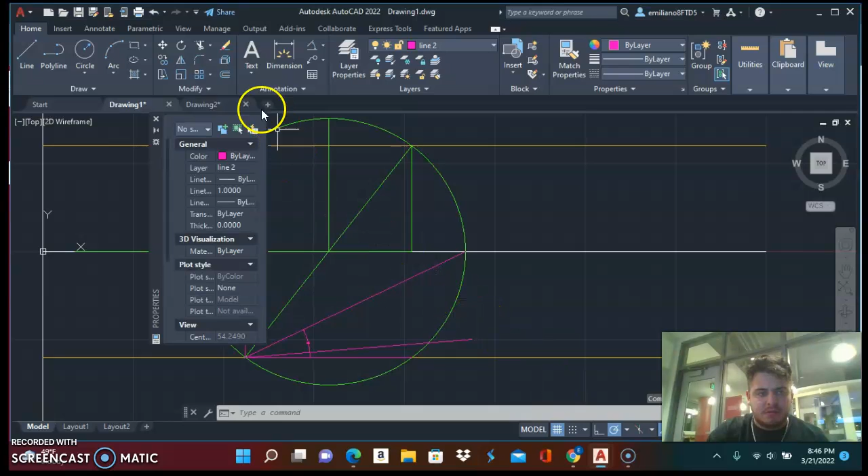I took a picture. It's not that one, this one. So this is the work that I did, but let me go ahead and start over. So the question was asking for the minimum and maximum stresses and the max shear and the angle between the horizontal plane and the maximum stress.

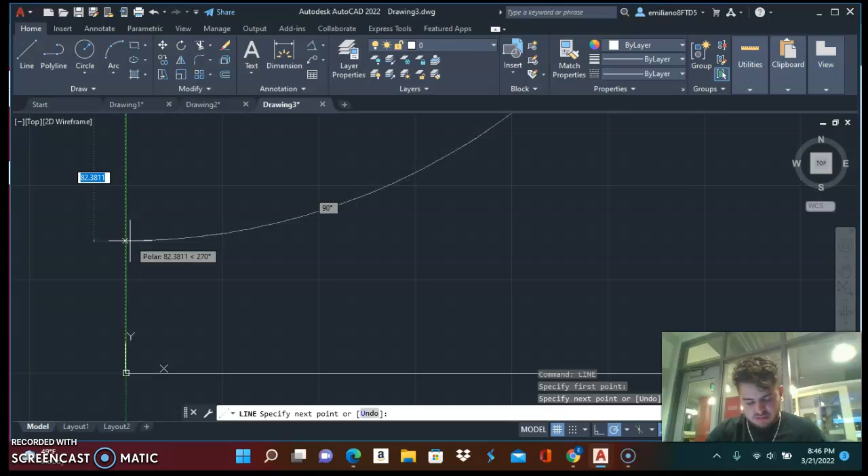So let's do a line from here to 100. Let me check real quick. So for sigma ZZ, it was 125 positive since it was in compression. Also, sigma XX is in compression, so it's going to be 75.

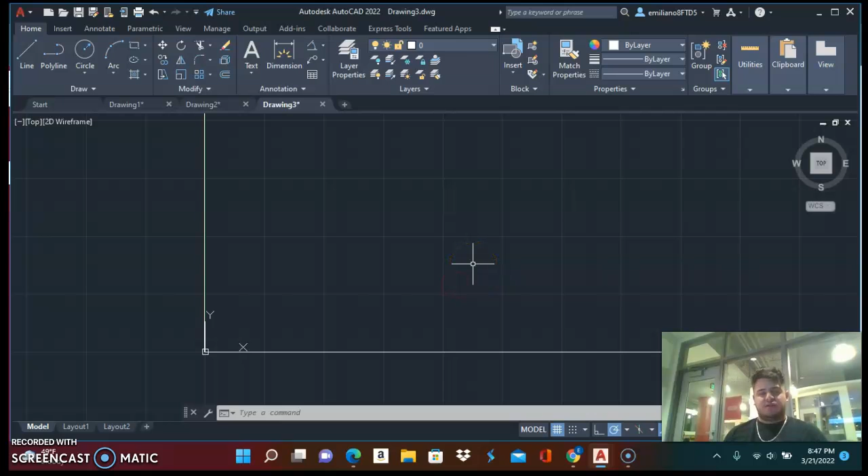And then for the shear, tau ZX was positive 40 since it was going counterclockwise, so it was positive. And then for the shear XZ, it was negative 40 since it was going clockwise, I believe. Yeah, it was going clockwise.

So now we got that. We're first going to plot our lines. Sigma XX was 75. Let's make another layer, calculations. You can do it green. Oh, I forgot something. I also need to do a line from here to 100. Okay, now that's done.

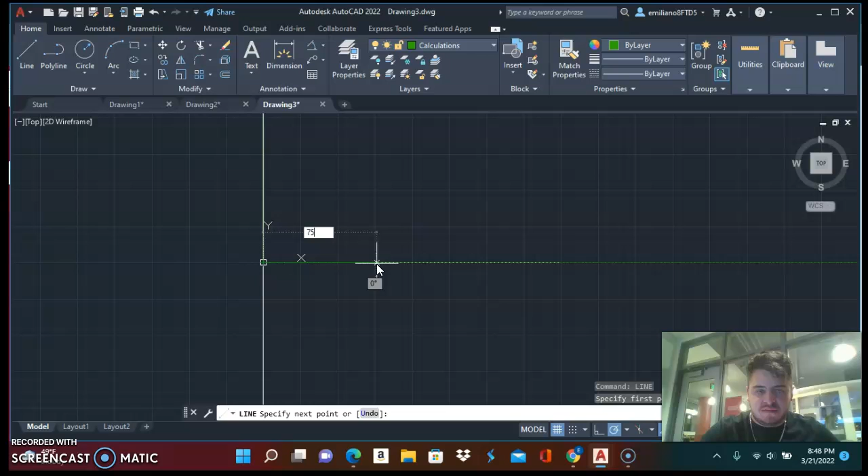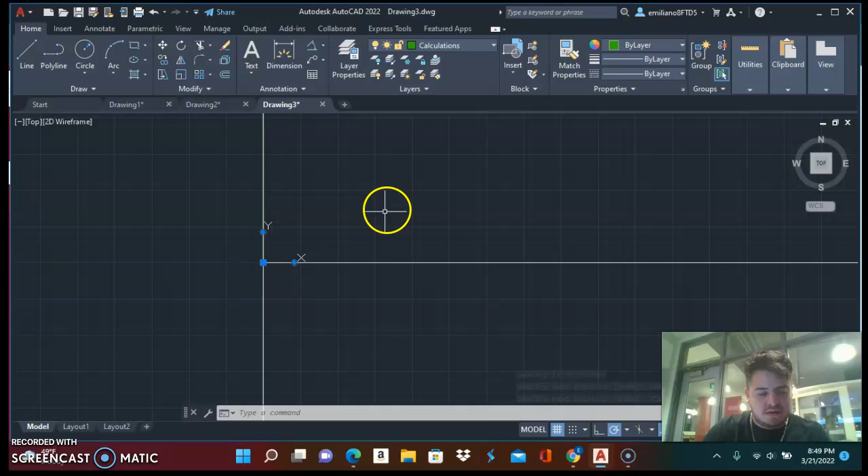So we're going to start from a line. Start from 0 and go all the way to sigma XX, which is 75. That's 75 right there. Make another line, which is 100. Let's make the line again, 0 to 75, which is sigma XX. There we go.

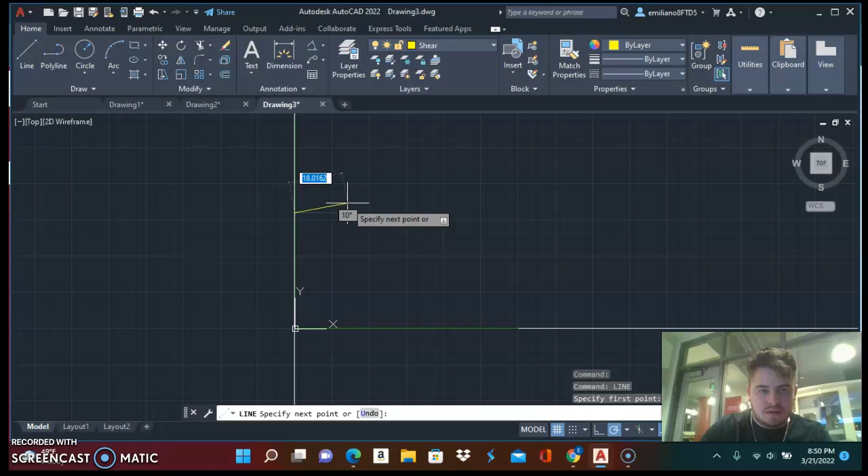From there, I don't know if this is the correct way of doing it, but this works for me. I'm going to do another layer, shear, in yellow. So for shear, it was both 40 and negative 40. So let's make a line at those points. Start from 0, 40, and go all the way down.

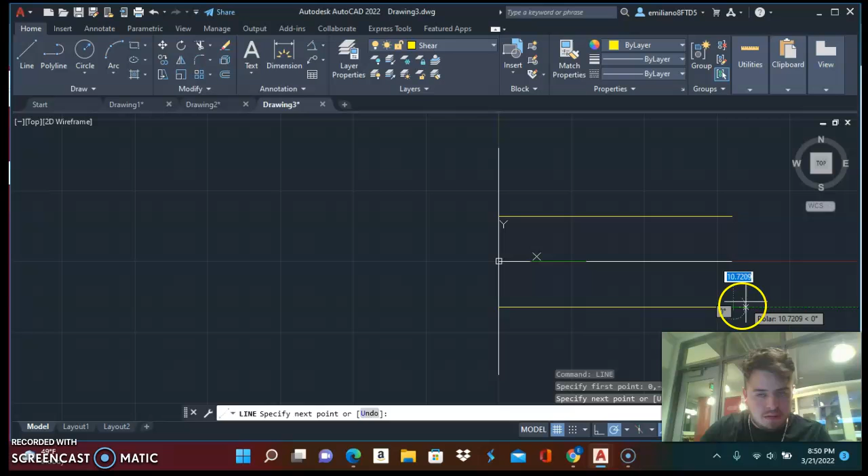And then we can make another line from the shear point at 0, negative 40. There you go. I'm not sure that's straight, so let's make it again. Okay, so 0, negative 40. Okay, I think that's better.

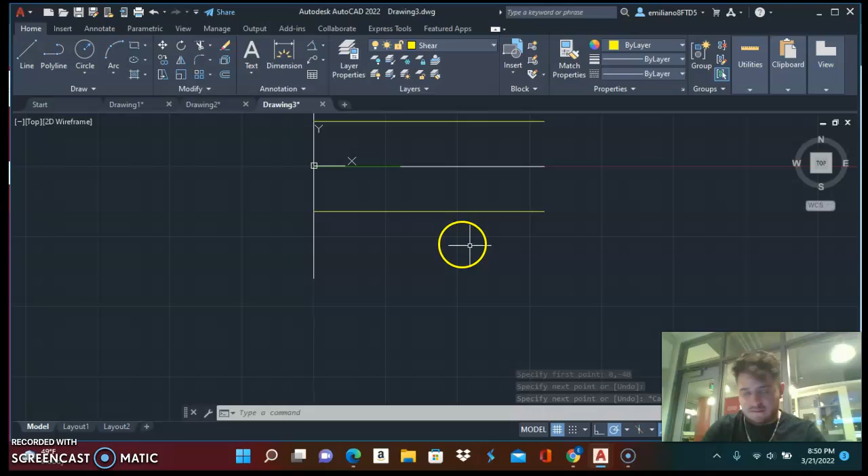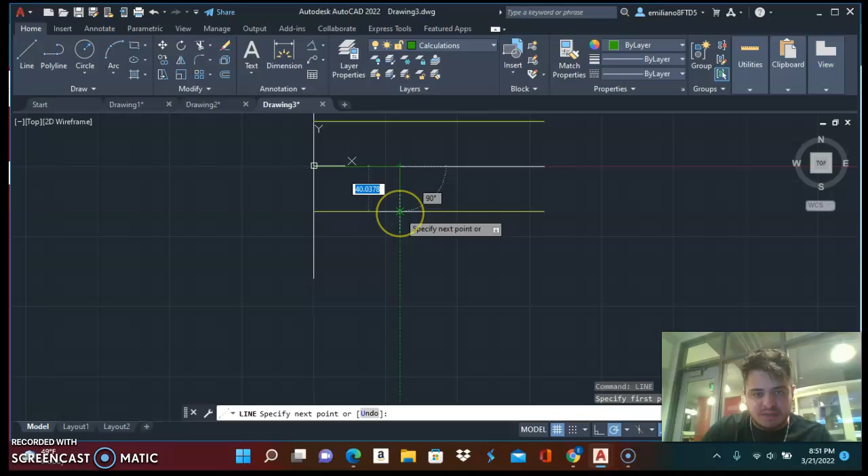So now I noticed that sigma XX is 75, and it had a negative shear, so we can go down to that line. Back to the calculations layer: a line from sigma XX to this point, the shear. We're going to delete that and put another line from this point, 0, to sigma ZZ, which is 125.

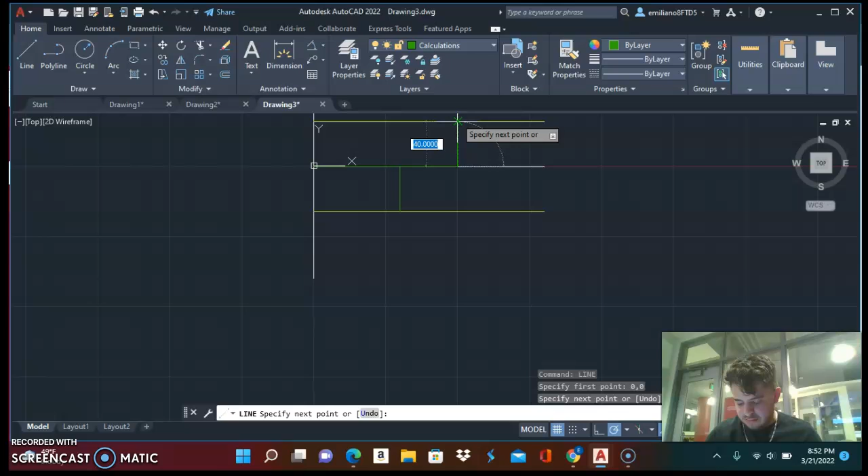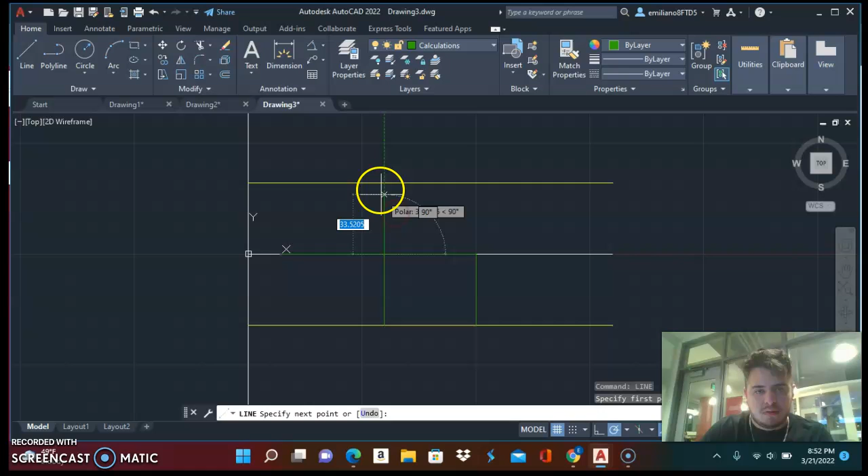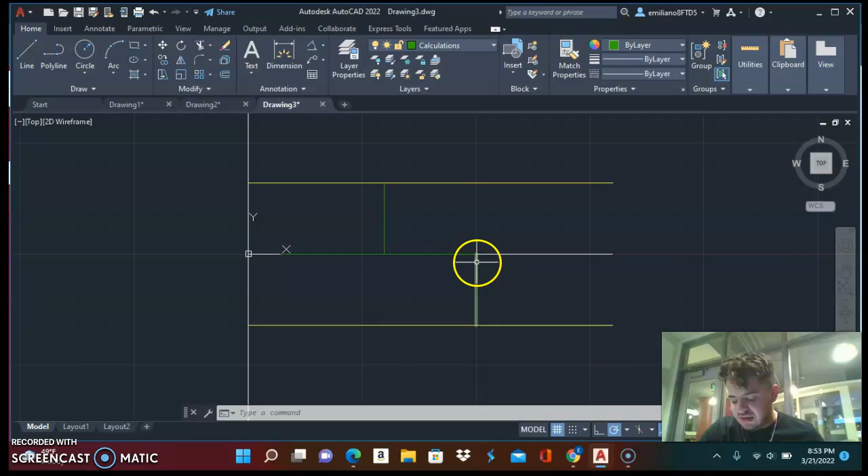Let's delete that one and make another line from this point to that point. So sigma XX is going to positive 40, and sigma ZZ, 125, going to negative 40. Then we make a line that connects both of these, and with that we found the center of our circle.

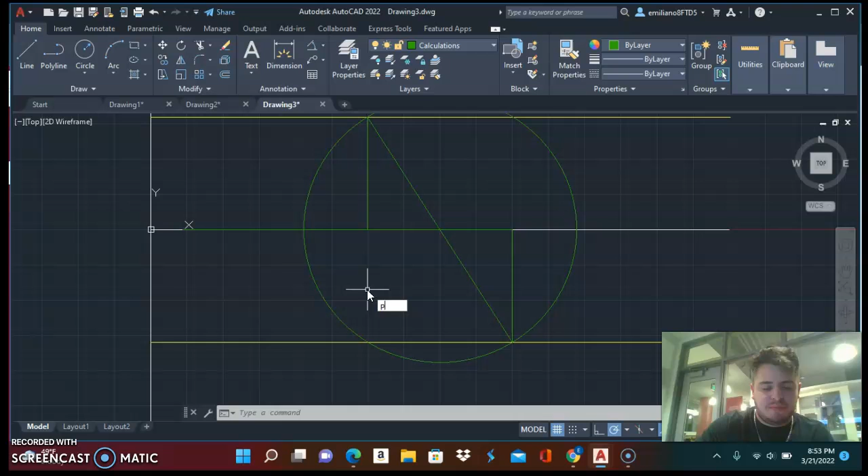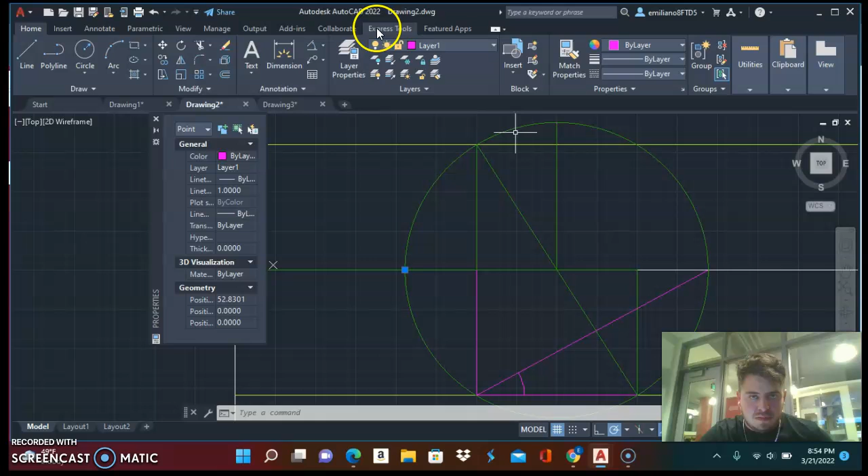Let's make a circle right here. We have a circle now, and then we have sigma 1 and sigma 3. Let's make this point and find its properties. I got 52.8. Something I messed up right here, but it's close enough. I'm not sure.

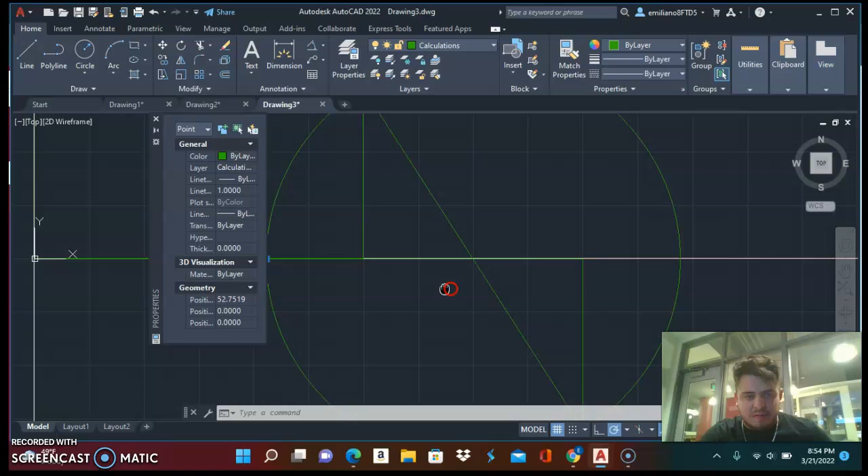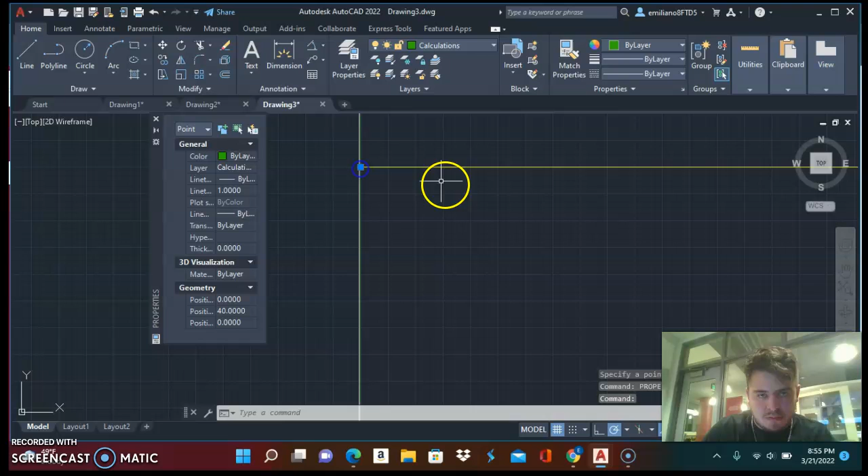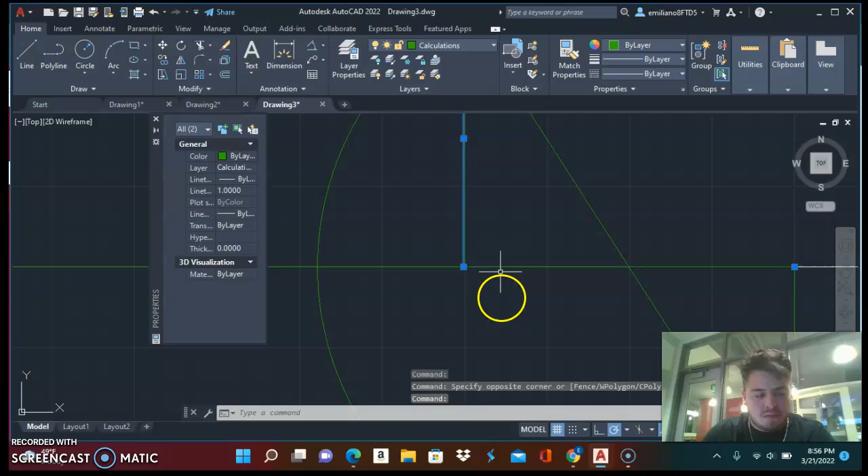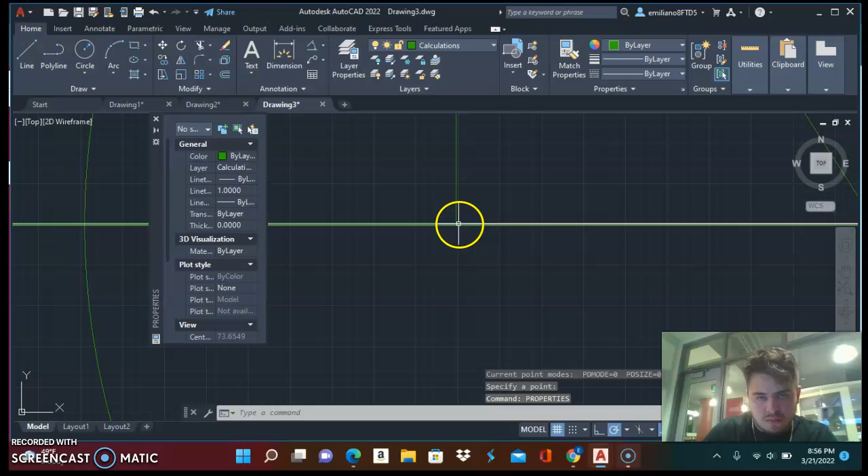Let's see what's wrong with this. It's 40. Plus 40. That's correct. There's a problem right there. I didn't make the line correctly, this line right here.

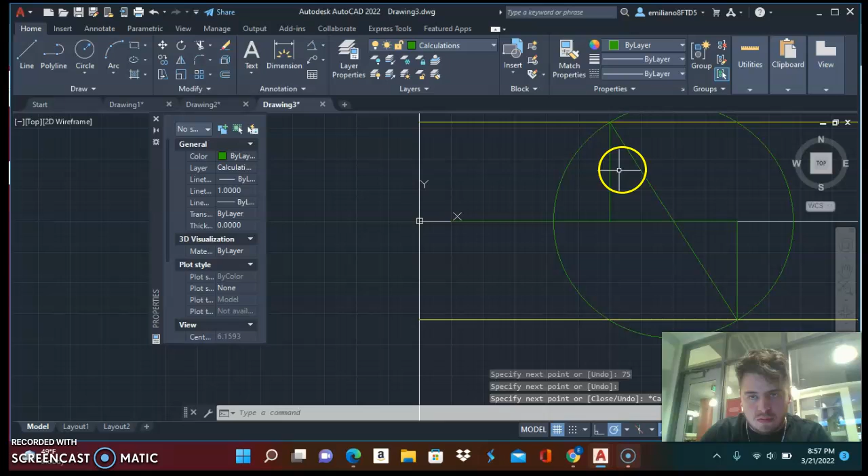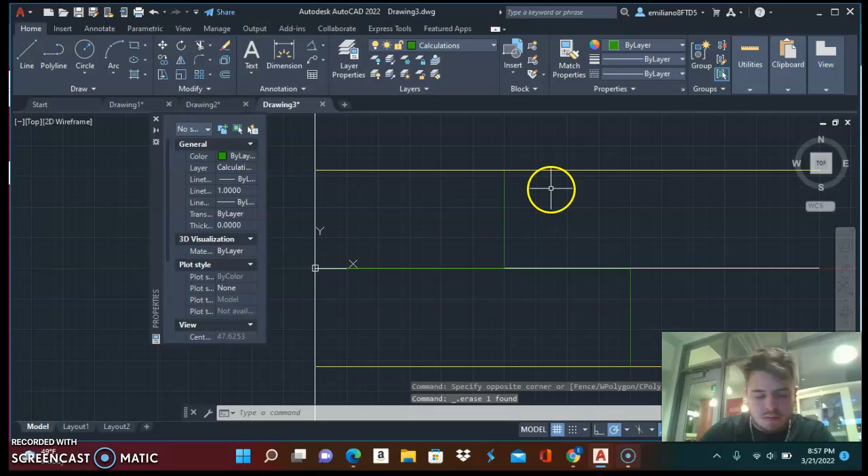So let's make another line to 75. Delete this one, and this one too. A line from here to here. Make a circle: we found its center, and we're making a circle. Now I think we got it right. Put a point right there. Okay, so the properties.

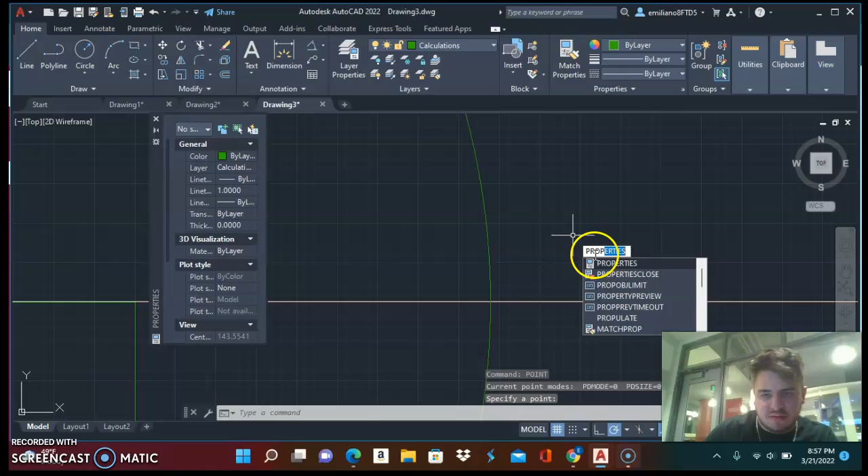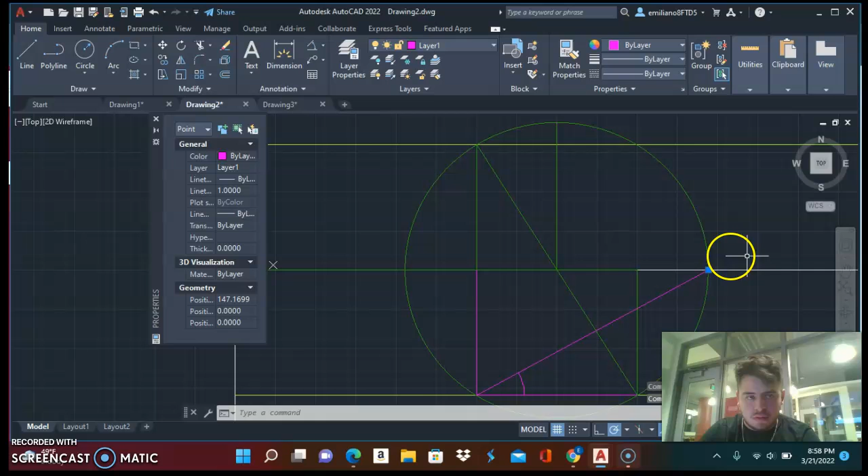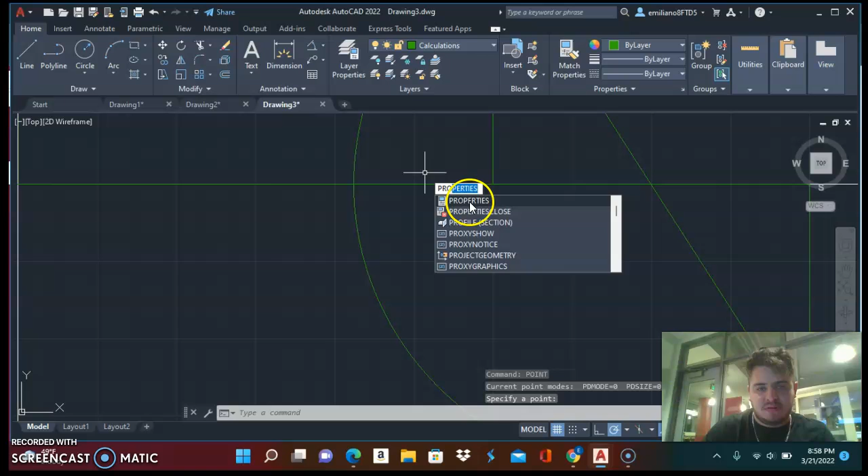Sigma 1, I got 146.9. That's the same as here? No, it's still different. I'm not sure where I went wrong, or if the one I did on the exam is right, but I got 146 for that one. And for this one, 52.9; I think I got 52.8 something. I'm not sure what went wrong, but let's keep going.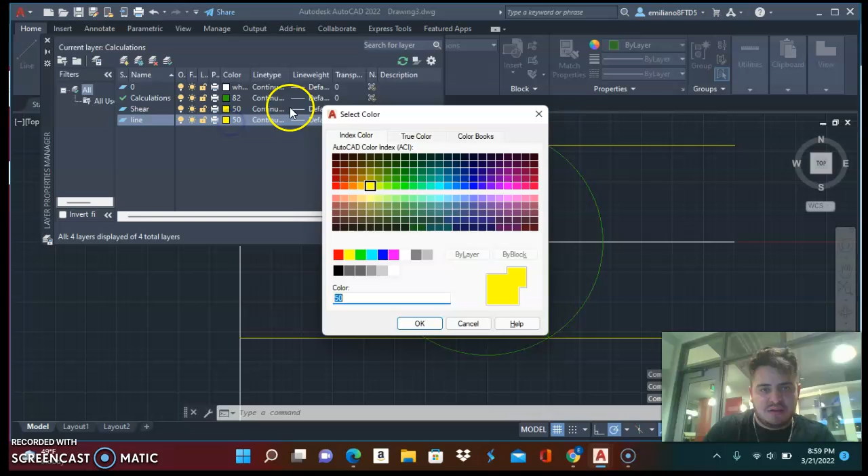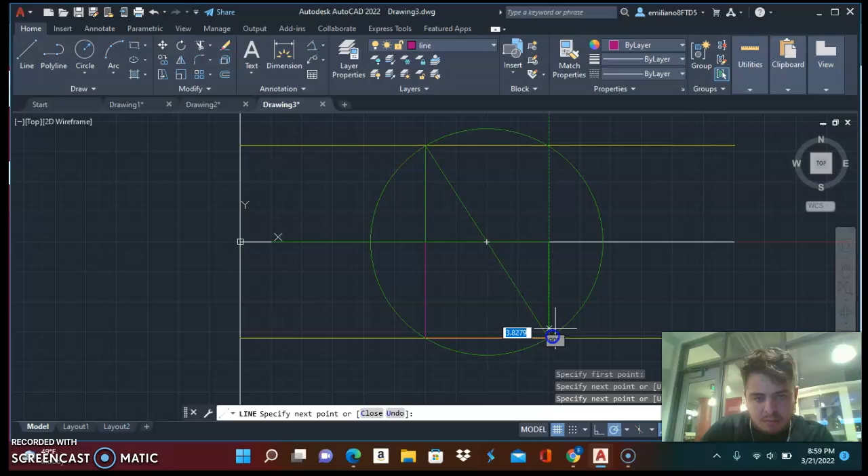Let's make another layer and put a line. Next we find the center of planes, from this point right here. I'm not in the right layer. I'm really struggling with this AutoCAD. For the angle, I worked down to here, and it shows 29 degrees.

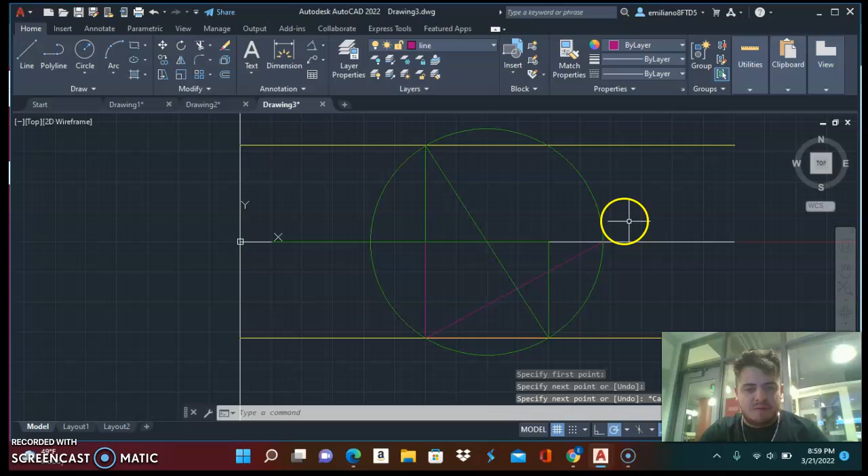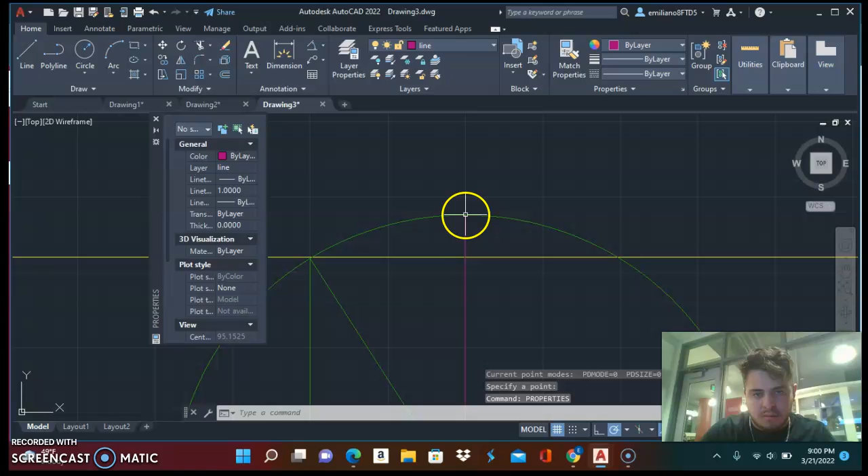29 degrees for the maximum stress, and for the maximum shear, I put a line from this point to this point, and it got me 47, I think. Yeah, 47 on the one I did for the exam too. I feel like the one from the exam was correct, but I followed the same steps here. I might have done something wrong with the points.